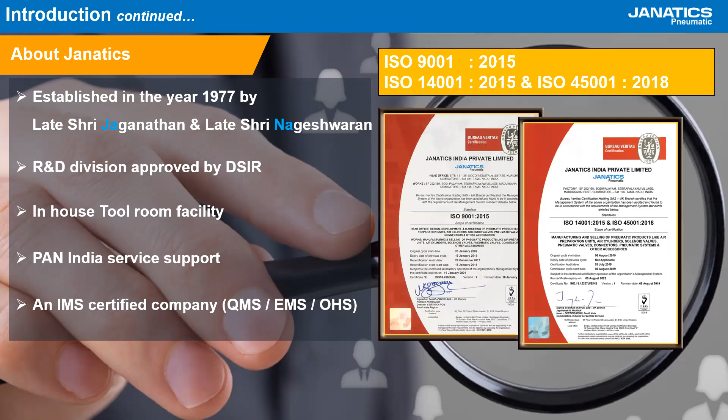Our company has its own R&D division approved by Department of Scientific Industrial Research India and in-house tool room facility. And we have pan-India service support. Ours is an integrated management system certified for quality management system, environmental management system, and occupational safety and health management system.

And we have replacement customers more than 20,000 plus in India. Our manufacturing setup is in Coimbatore with 110,000 square feet in-house capacity spread over 35 acres in Bodipalayam village. In Ahmedabad and New Delhi, we are having a small assembly setup where CKD items will be sent from Coimbatore to there to cater to the customers at the earliest.

In Janatics, we do pneumatic products required for industrial automation, ranging from working elements, that is air cylinders, which we manufacture from bore dia of 6 mm to 600 mm.

And if we take control elements, that is valves, including final control elements and signal elements, those valves we manufacture from the size of M5 to half an inch in various models and sizes.

And if we take service elements, that is filter, regulator, lubricator, we do right from 1/8 inch port size to 1 inch size. In addition to that, airline accessories, fittings, tubings, and hose nipples also we do.

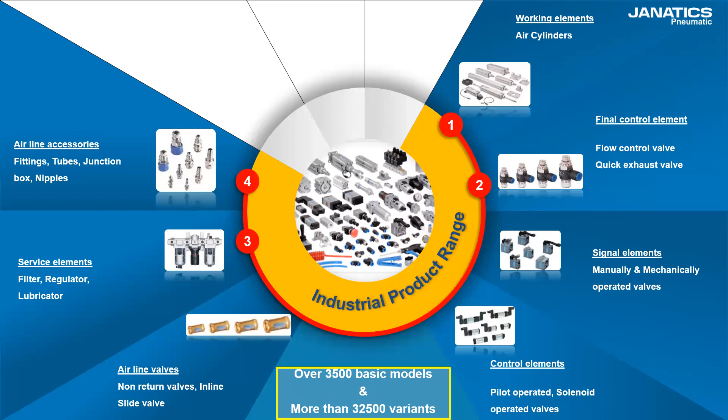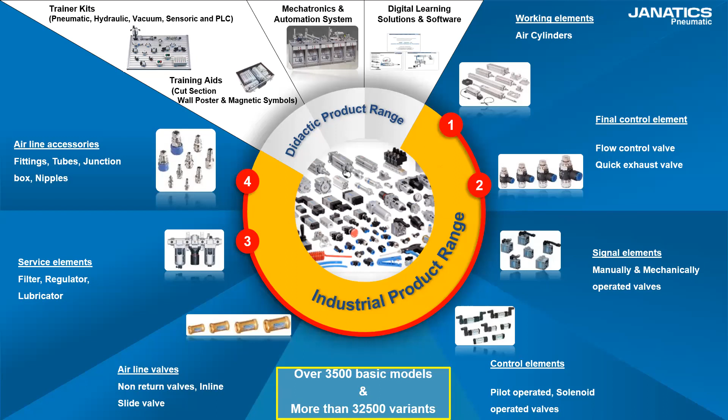With all these products, we are giving educational training kits, that is didactic products, to engineering institutions, like training kits, training aids, automation systems of modular manufacturing systems, a replica of industrial automation, a miniature model, and automation studio software, also solutions for circuit building.

Combining all our products, we give a complete package to the industries, like cabinets, door opening closing systems, a package to BRTS bus transport systems, as well as railways.

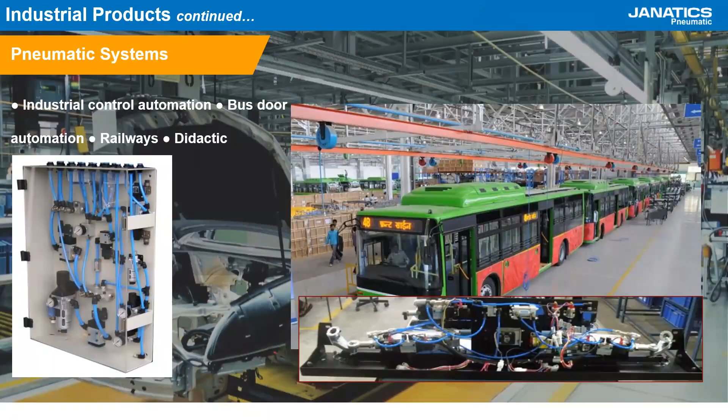Now we enter into the session, basics of pneumatics. So, need for industrial automation.

Industrial automation is done by three major elements, that is pneumatics, hydraulics, and electrical and electronics. In general, these three technologies are used in industrial automation to achieve productivity and consistency in quality, with a reflecting reduction of manufacturing costs.

Though these three automation methods are followed in industries, as we are doing pneumatics, we are going to see more in depth about pneumatics.

In comparison with hydraulics and pneumatics, the medium used in pneumatics is compressed air. In case of hydraulics it is hydraulic oil. Since oil is used in hydraulics, we cannot let it escape to atmosphere as we do in pneumatics.

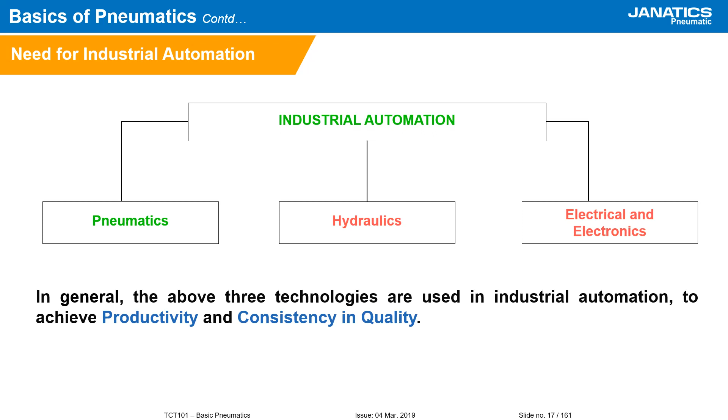The subject that deals with pneuma, a Greek word meaning air, is called pneumatics. Products that use compressed air as a medium for operation are called pneumatic components.

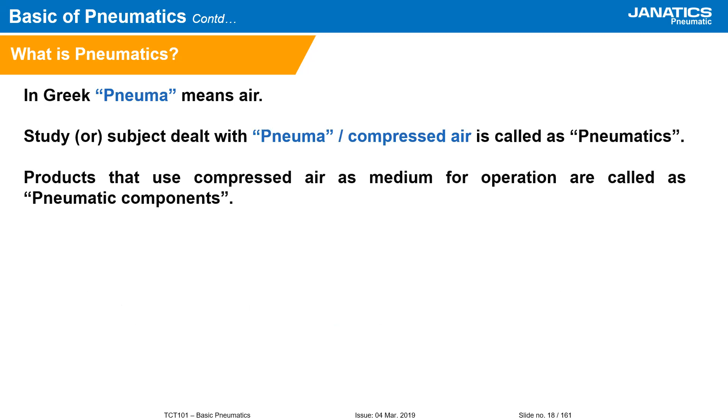So pneumatics is widely used by small and medium scale enterprises implementing low cost automation for reducing machine cost investment, to reduce process time, to increase productivity, and to have consistent quality.

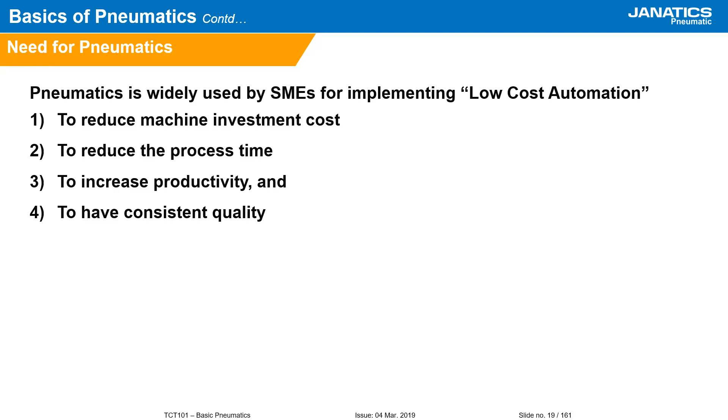So the final output of pneumatics is in the form of actuators, that is cylinders. It will be given in linear motion or rotary motion. Normally linear motion is the output. When we use a rack and pinion in a closed form, we get the rotary actuation, rotary motion.

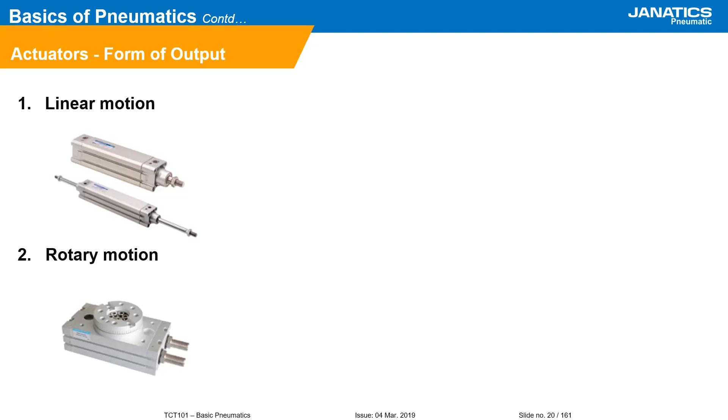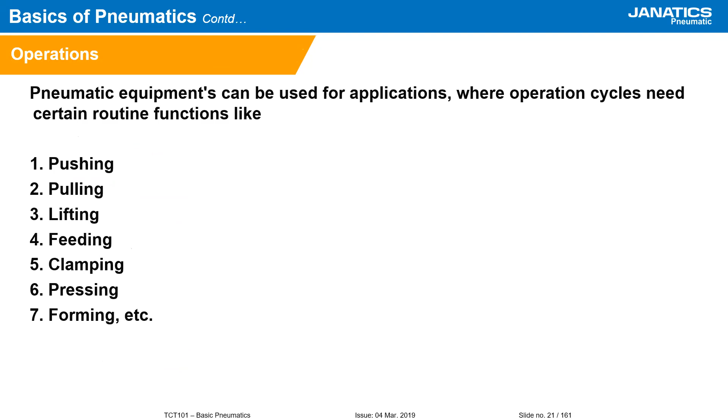These to and fro, repeated operations, wherever repeating in the industry, for that automation these pneumatic cylinders are used, which perform functions like pushing, pulling, lifting, feeding, clamping, pressing, forming, etc.

As we told, the major application areas mostly will be applicable in textile machineries, machine tools, pouch packing machines, shell molding machines, foundry machineries, labeling machines, plastic injection molding machines or rubber molding machines, pharmaceutical machines, etc.

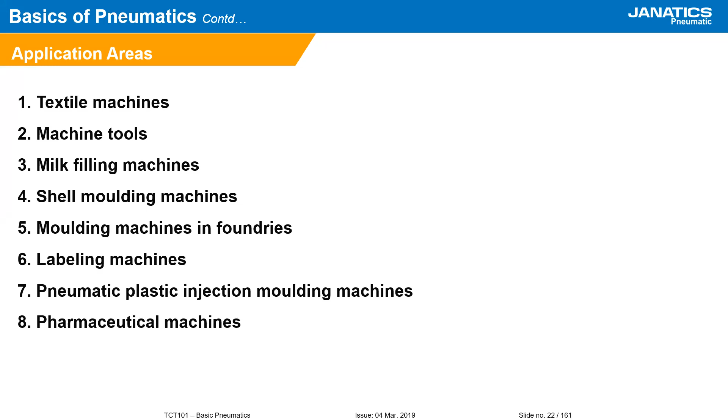In addition to that, pneumatics is completely used as an application in some areas which are called pneumatic equipments. Those are pneumatic horns for automobiles, pneumatic brakes in automobiles, pneumatic spray painting equipment, pneumatic rammers in foundries, and pneumatic drills and grinders in industries.

Classification of pneumatic elements will be classified into 5 major categories. Those are working elements. The final one is the working element where the work is being carried out, that consists of air cylinders.

Air cylinders are controlled by control elements, that is directional control valves. These control elements will control the working element air cylinders, but air cylinders will be performing at high speed, say about 1 meter per second is the normal speed of the actuator.

If you want to reduce or increase the speed of the actuators, we need final control elements, which are flow control valves or quick exhaust valves.

For controlling the working elements, we have to get a signal, that is when to start, after which operation has to be done, like that.

Those signals will be received from such valves which are called signal elements, that is push button valves and roller lever valves.

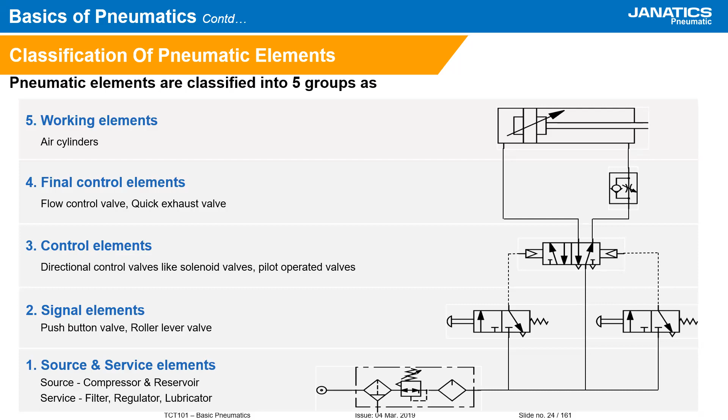These combined items, filter, regulator, lubricator, are called service elements. So these are all the 5 major elements in pneumatics. First, we are going to see about air preparation units, nothing but service units.

You see, when the source, that is the compressor, sucks in atmospheric air, it is pressurized and stored in the compressor tank. That will include atmospheric dust particles, water vapor in the atmosphere, everything.

These moisture and some of the oil from the compressor are mixed together, collide with dust particles, and can form heavy particles which will corrode the seals in the pneumatic products.

So moisture in air can corrode pneumatic equipment, causing malfunctioning of the system due to the emulsion formed by moisture and lubricating oil. The problem is more aggravated in the rainy season or in areas where relative humidity is high, that is, seashore areas. Corrosion will be much more in coastal areas.

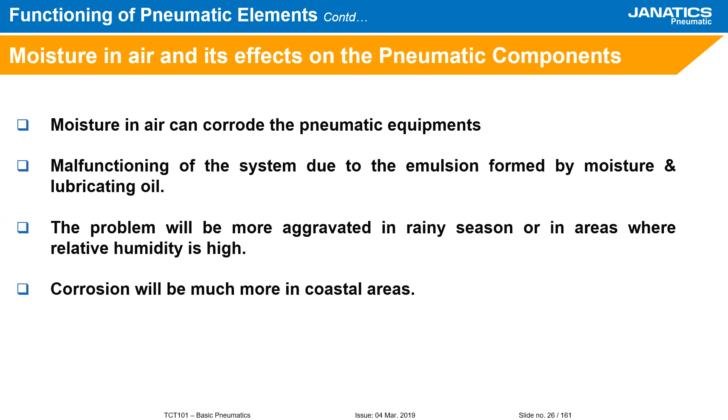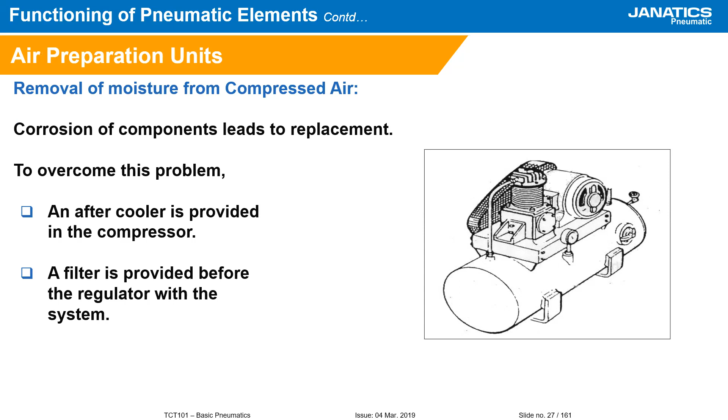To remove these corrosion-causing components, we have to use service elements. To overcome this problem, an after-cooler has to be provided in the compressor, and a filter is provided before the regulator in the system to remove all these unwanted elements.

So, filter. We are seeing how a filter looks internally. This filter separates the dust, dirt, moisture and other contaminants from the compressed air up to a level depending on the size of the filter element.

We can see a filter element here. This is a sintered bronze filter element. This filter size, normally when bought in the market, will be of 40 micron capacity. 40 micron capacity means dust particles beyond 40 microns in size will be filtered, while sizes less than 40 microns will be allowed to pass through.

See here, unfiltered air enters through the inlet of the filter, which is coming here, and will not be allowed to pass directly through the filter element. A conical shield is given there so that the air is allowed to come beneath it.

As well as that, a fan-like product called a separator is also fixed here. This separator ensures that the compressed air has a swirling motion. So when the air swirls, the heavy particles are centrifuged and fall down.

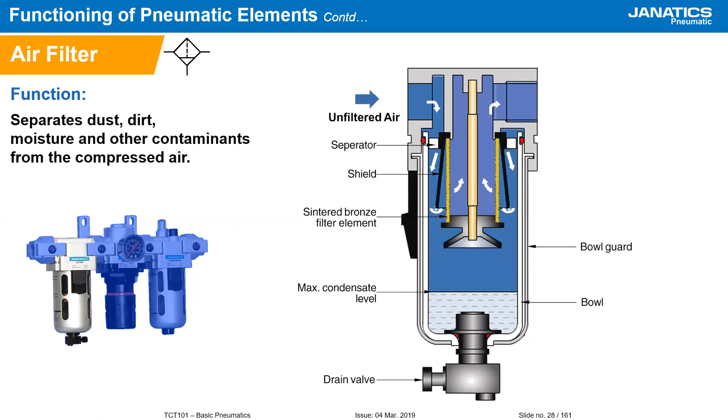So in the filter, this steel bowl guard has a bayonet-type locking arrangement where we can easily remove it. When we remove the bowl guard, the bowl also comes along with it, with a retained O-ring, so there is no chance of the O-ring falling.

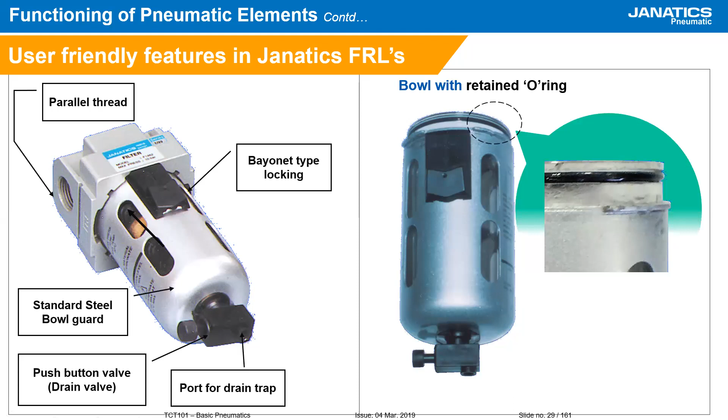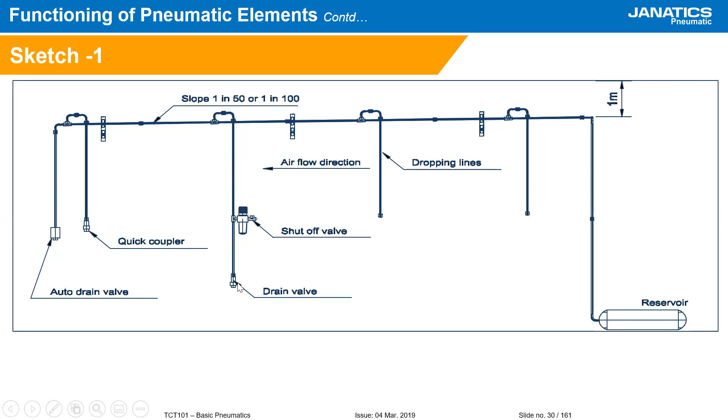From the hip level, at least 2 feet is required to collect the water or dust particles anyway due to gravity itself, and here auto drain valve can be fixed.

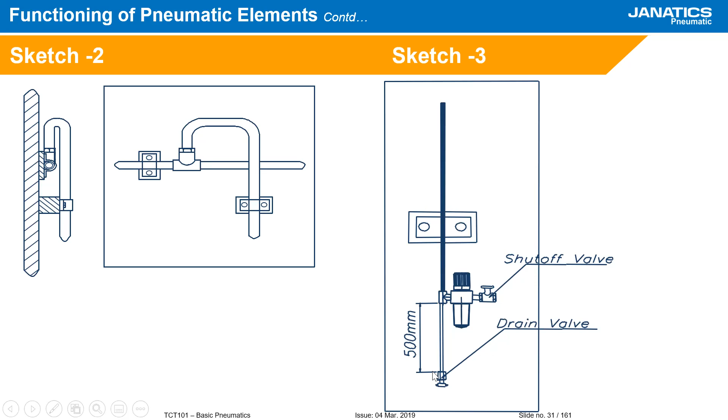That is about the filter, and now we are going to see the pressure regulation. What is pressure regulation?

Pressure is nothing but when we have a 1 liter bottle of water without any medium inside, air will automatically be there filling the 1 liter. Though the 1 liter of air is inside the water bottle, if you fix a pressure gauge, it will show 0 bar.

That pressure has to be regulated when used in automation. For that, a pressure regulator is required.

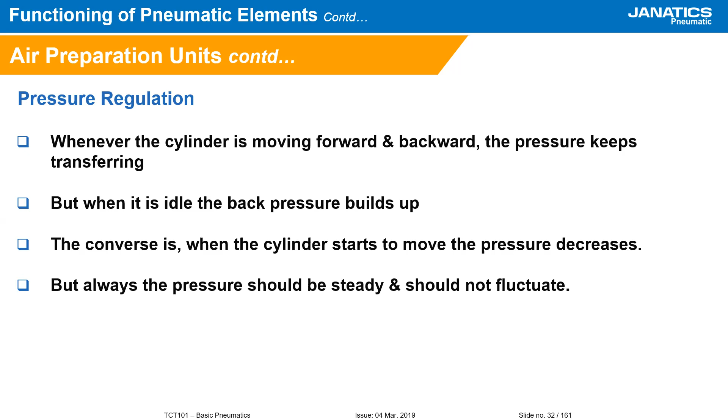In another way, we can say that if we need to pick and place a glass tumbler, what will happen if pressure fluctuates? If the pressure exceeds, the glass will break. Otherwise, a pressure drop would make the cylinder drop down and break it.

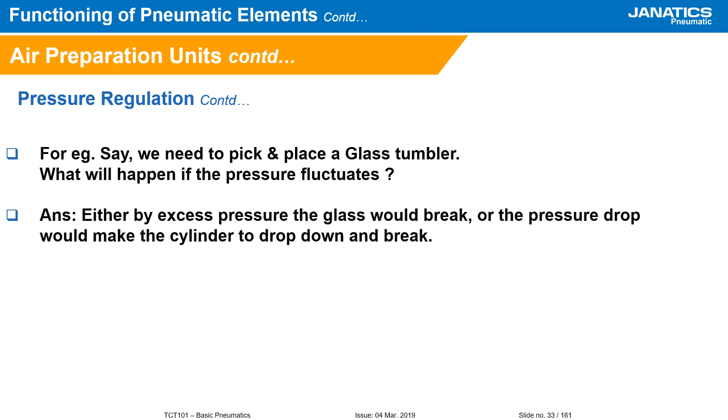So how does the pressure regulator function? We can see. To maintain a steady outlet pressure, regardless of a fluctuating inlet pressure, we need a regulator to control the pressure and have the outlet pressure without any fluctuations.

In case of the filter, it has to always be mounted in this vertical position only, because water will be collected here, so it should not be mounted in any inclined position. Whereas the regulator can be fixed in any direction.

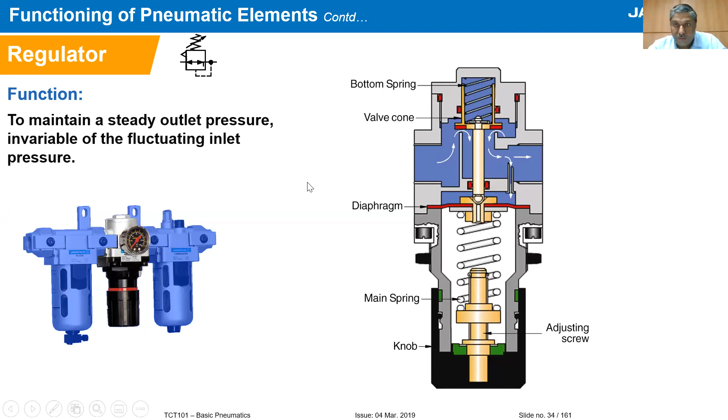Lubricator is used to feed lubricants to pneumatic equipment. Why does it need to be lubricated? Due to friction, heat is generated, which leads to damage of seals. So in order to reduce heat generation or friction, we mix lubricants along with the compressed air and allow it to pass through the compressed air. For that, lubrication is required.

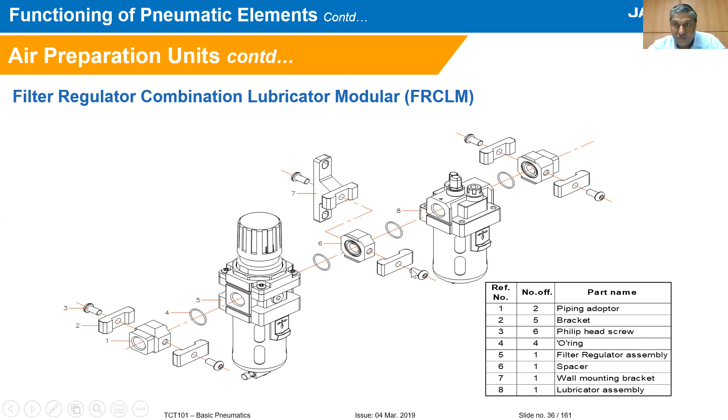This screw or this screw, if we remove it, the regulator can be easily removed. So there is no need for hard pipe wrenches or spanners to remove this. So maintenance will be easy if we are mounting with modular arrangements.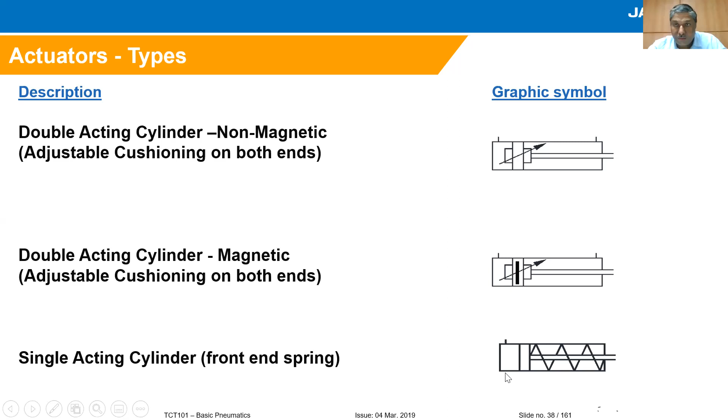Whenever we talk about single acting cylinders, we have to specify whether the spring is a front-end spring type or a rear-end spring type. In a single acting cylinder, there will be a spring guide here and the spring is used here.

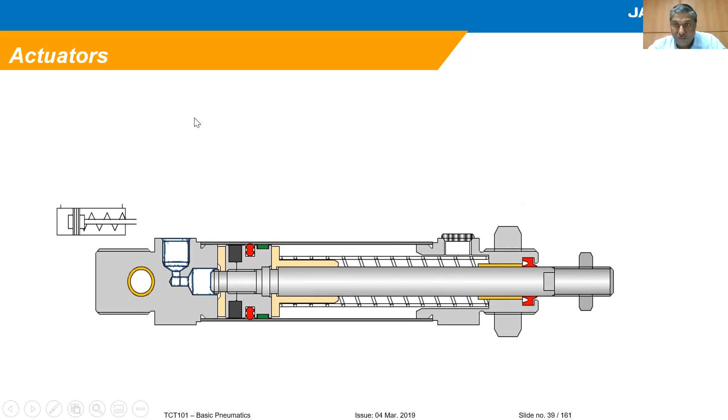The parts are: barrel, piston, spring guide, rear end cover, and front end cover. Air is given only to the rear end cover. It presses the piston against the spring force and makes the piston move forward, extending the piston rod. If you disconnect the air, due to the spring force, the piston automatically retracts. For this purpose, single acting cylinders are used.

So single acting cylinders perform operating force motion only in one direction. For motion in the other direction, they depend on a spring or some external mechanical force. Even if a spring is not used in the cylinder, depending on the application, external mechanical force can also be used for returning the cylinder. In that case, even though it is a double acting cylinder, it will act as a single acting cylinder in applications.

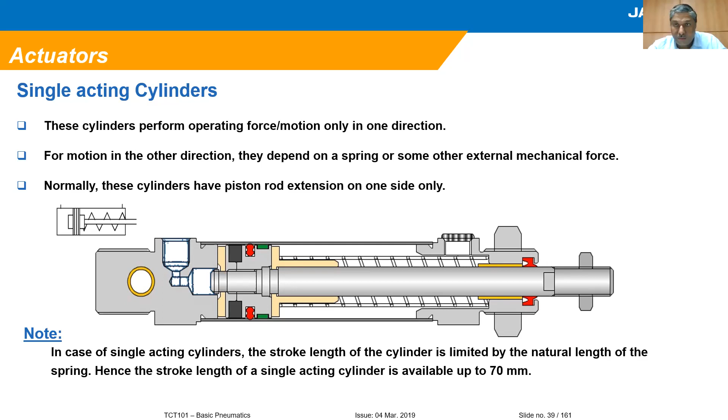So normally these cylinders have piston rod extension on one side only. In the case of double acting cylinders, the spring is not there, that is the difference.

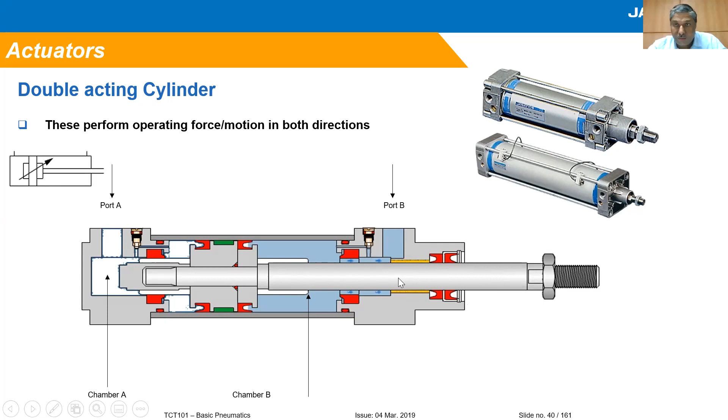Normally these double acting cylinders have a sintered bronze bush for better support. The length of the sintered bronze bush is such that it won't allow the piston rod to bend, because the piston rod extends outside and due to the cantilever load, it should not bend. For that, sufficient length of sintered bronze bush is given here.

A double acting cylinder that has a piston rod on both ends is called a double end double acting cylinder, where simultaneously any work can be done.

For example, if two drilling machines are kept side by side, one single operator can operate both using a double end double acting cylinder for clamping. When one drilling machine's clamp is engaged, the other end will be free, where the operator can remove the finished product and load another for drilling. When we actuate the cylinder the other way, that side clamps, and the drilled part can be removed and a new product loaded. These types of applications use double end double acting cylinders.

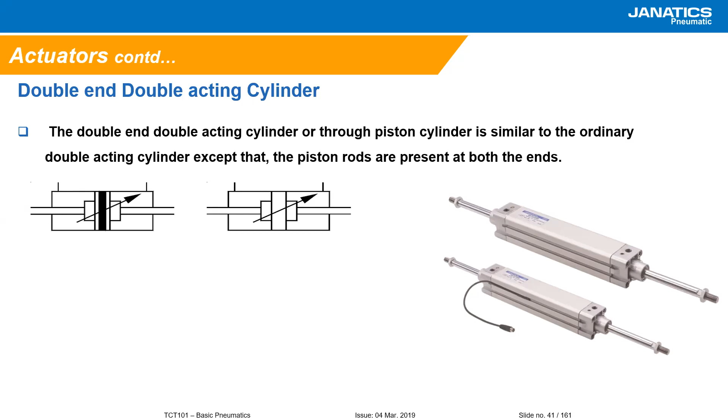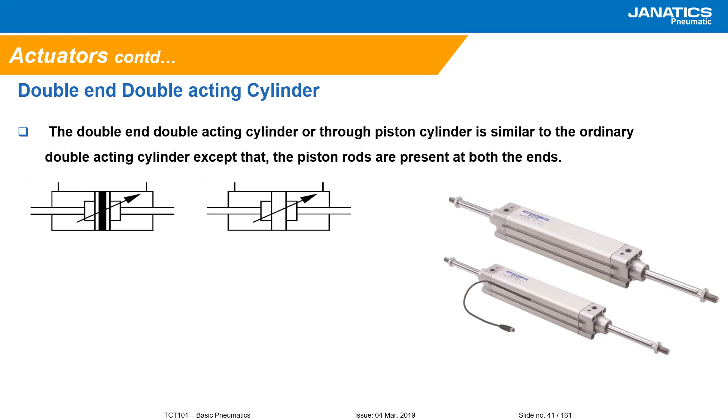Double end double acting cylinders are also used for adjusting stroke length. Suppose a cylinder has a 100 mm stroke length; if we add a 20 mm bush on the opposite side of the piston, instead of 100 mm stroke it will allow only 80 mm. So in a fixture where we don't want multiple cylinders or multiple fixtures, or don't want to change the cylinder, this arrangement helps reduce time.

Another type of actuator is the multi-position cylinder. In multi-position cylinders, the cylinders are mounted back to back, as you see in the picture. It can perform 3 or 4 positions.

Connecting two cylinders of identical piston diameter but different stroke lengths in series gives back-to-back cylinders. As the pistons of the cylinders are not joined together like in double end double acting cylinders, they tend to travel in opposite directions.

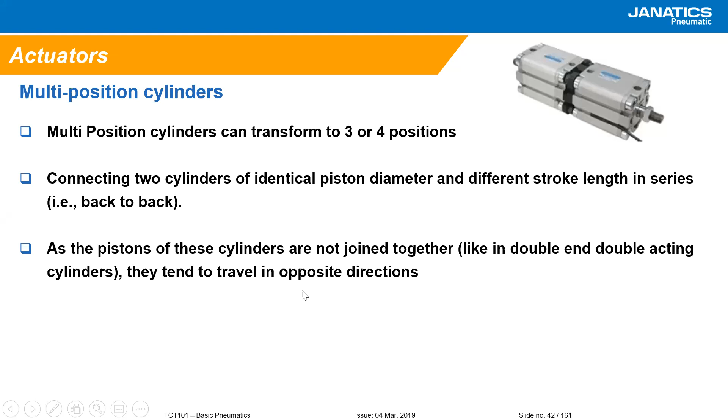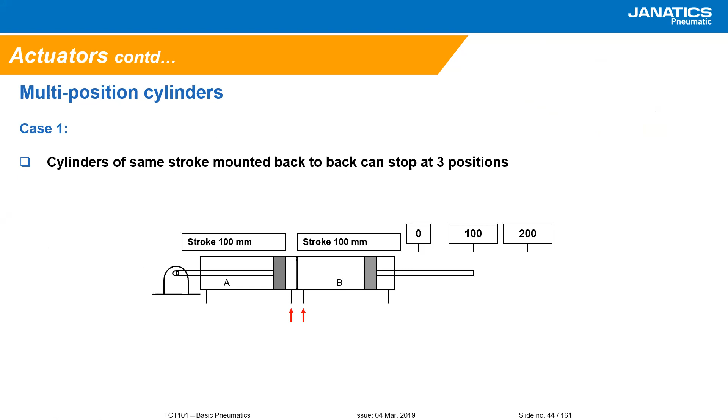For example, consider a multi-position cylinder with two equal stroke lengths, A and B, each 100 mm. When I operate cylinder B, it gives a 100 mm stroke. If, while B is extended, I also operate cylinder A, it gives a second position of 200 mm. When cylinder A is actuated alone, it again gives 100 mm. But if we have different stroke lengths, say one of 100 mm and another of 50 mm, we can achieve 4 positions: 0, 50, 100 and 150 mm strokes.

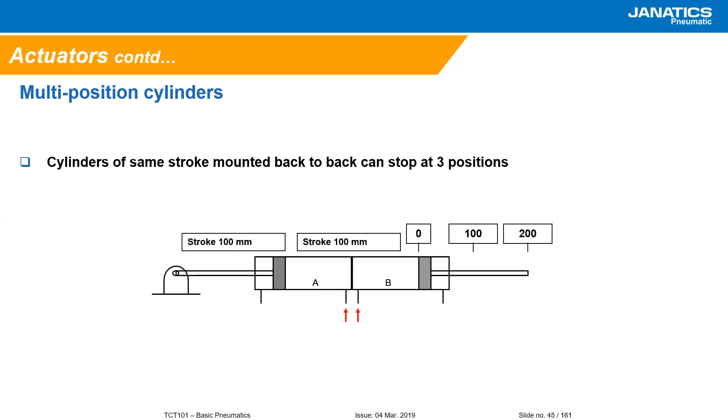For this purpose, multi-position cylinders are used.

Compact cylinders. When explaining double acting cylinders, I mentioned the sintered bronze bush used for better alignment when the piston rod comes out, to arrest the cantilever load. This bush is provided, and because of it, the length of the front end cover is much higher.

In case of dies or certain application areas, cylinders are required with total length fitting in a very short span. For these areas, we use compact cylinders where the sintered bronze bush length is very small, so the end cover length is also sufficiently reduced. They provide the same force forward and retract as a normal cylinder, but the total length is much less. Because of that, we should not have more length of piston in this compact cylinder, otherwise cantilever load will cause leakage.

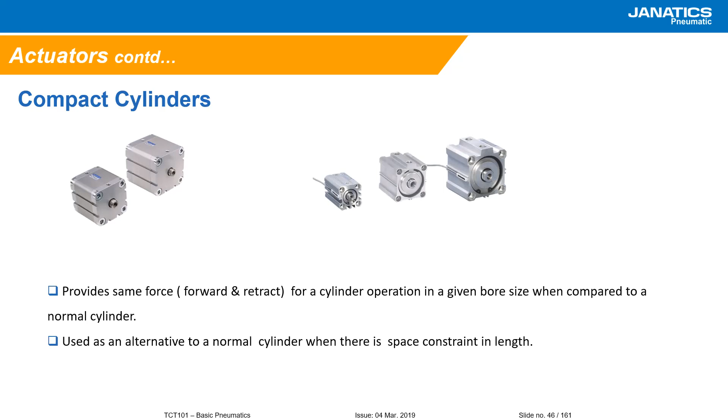Compact cylinders are used where the total length of the cylinder cannot be accommodated. In case sufficient length is available but width is not, we can go for tandem cylinders, where the piston rods are connected.

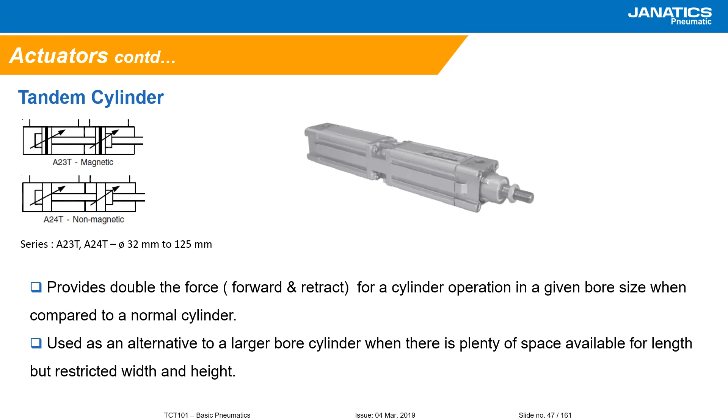When air is given to the rear end connection, the output force is doubled. For example, suppose a load of 1.5 ton is required; we would need a 200 mm bore diameter cylinder. But a 200 mm bore dia cylinder has a width of nearly 1 foot, and in some cases a 1 foot width cylinder cannot be accommodated. So instead we can use two 125 mm diameter cylinders in tandem position, so that the required load can be achieved. In such cases, tandem cylinders are used.

Another type of actuator is the rodless cylinder. In a normal cylinder, a rod comes out, whereas in rodless cylinders there is no rod. Instead, there is a sliding projection, and this slide is able to move from one end to the other. So the total length of the cylinder will not be very high.

These type of cylinders are used in door opening and closing applications of 1 meter or 2 meter length. Rodless cylinders can be used where the total length is a constraint - in case of a normal cylinder of 1 meter stroke length, the total length of the cylinder will be beyond 2 meters. Whereas in case of a rodless cylinder, that 1 meter plus the end covers length all together will fit within 1200 mm itself.

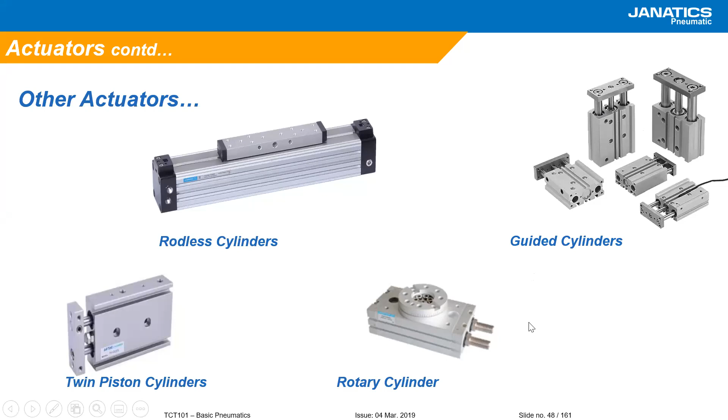And the same cylinder with an inbuilt rack and pinion arrangement will give a rotary motion - that is called a rotary cylinder.

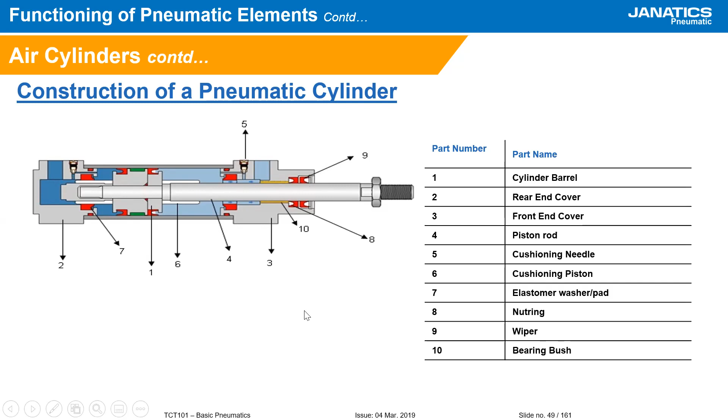This is a simple construction of a pneumatic cylinder.

In the cylinder, when the piston rod is moving - that is, in automation applications - it is often required for a signal to be generated when the cylinder piston reaches a particular position along its stroke, so that the control system can initiate the next phase of operation. Think that a cylinder is moving forward of 100 mm stroke - once the 100 mm position is reached, the next operation has to be done. For that, a signal has to be received from the system. That signal can be generated when the piston rod trips a micro switch or a pneumatic valve which is placed near the piston rod.

Or otherwise, magnetic sensors mounted directly on the cylinder barrel sense the magnetic field created by a permanent magnet incorporated in the piston and trigger a reed switch. That reed switch output can be used as a signal. So these are the two ways the position can be sensed.

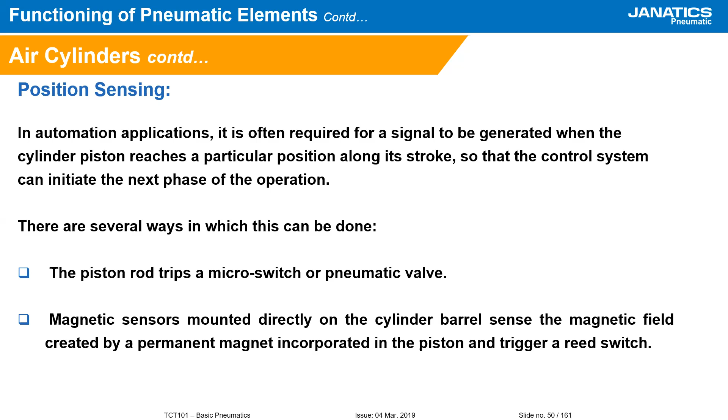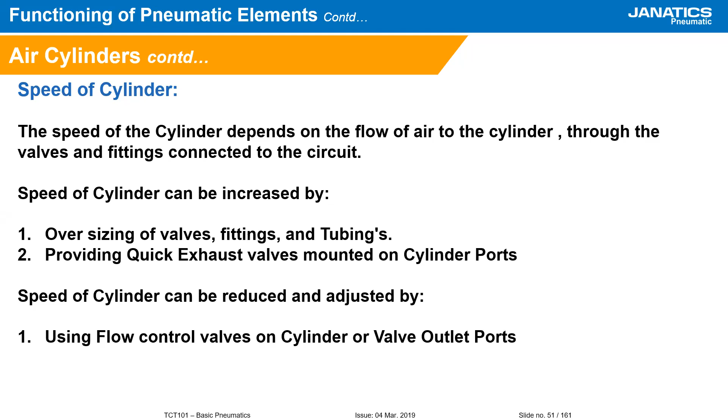In case of speed of the cylinder, the speed depends upon the flow of air to the cylinder through the valves and fittings connected to the circuit. Speed of the cylinder can be increased by oversizing valves, fittings and tubings, or providing quick exhaust valves mounted on the cylinder ports. Speed of the cylinder can be reduced by adjusting flow control valves on the cylinder or valve outlet ports.

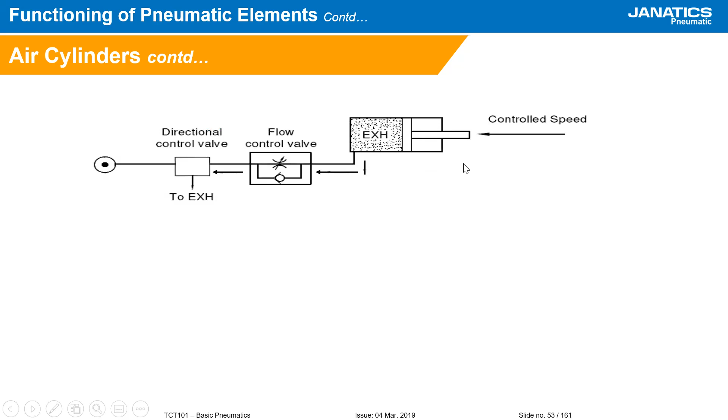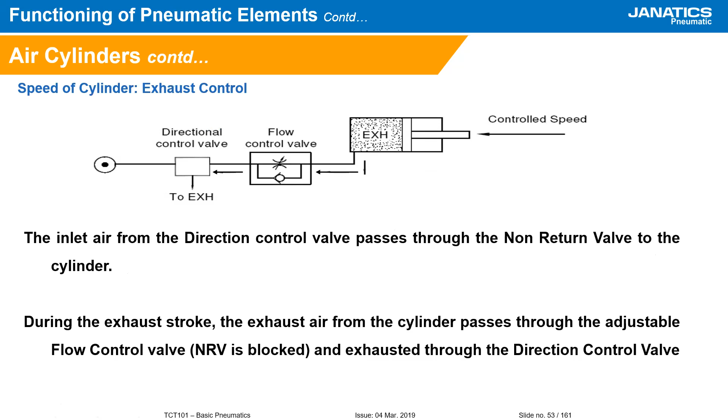That is, the inlet air from the direction control valve passes through the non-return valve to the cylinder. During the exhaust stroke, the exhaust air from the cylinder passes through the adjustable flow control valve because the NRV is blocked, and is exhausted through the direction control valve. So when we use both valves, inlet control type and exhaust control type, controlled speed in both directions is achieved.

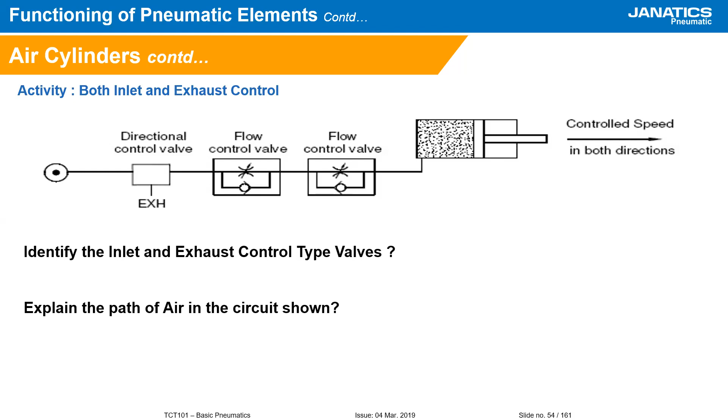From this we can identify which one is exhaust control and which one is inlet control. It is always advisable to have an exhaust control method in pneumatic operation. If we have controlled speed where the inlet air is controlled, there is a chance of getting a jerk during cylinder operation. So we have to ensure the exhaust air from the cylinder is always controlled for getting a smooth operation.

In case of cylinders, as I told you earlier, we manufacture 6 mm bore diameter to 600 mm bore diameter cylinders. So for our application, which cylinder has to be selected? That will be a question. For selecting a cylinder, the size we require depends upon the load it is going to actuate, or the load it has to pull or push, whatever it may be, and the available air pressure.

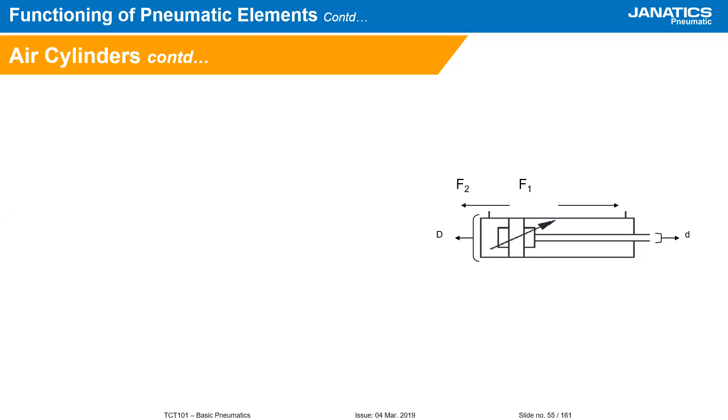So when the cylinder is static, how do we get the force available at the piston rod end? During extension of the piston rod, the force given by a cylinder is the cross-section area of the piston multiplied by the pressure, multiplied by mu, that is the coefficient of friction. We take this as 10% frictional loss, meaning 90% efficiency is considered for the cylinder. So 0.9 is put as the coefficient of friction.

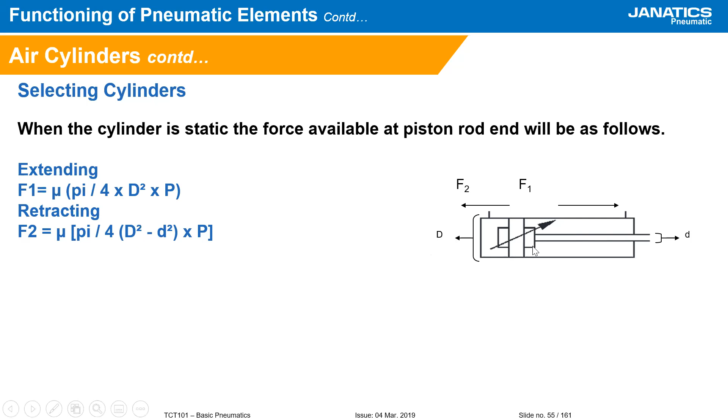Since the force exerted by a cylinder is area into pressure, and the pressure from the compressor air is normally 5 bar, the area of the bore diameter or the piston area, which is circular, is pi by 4 d square into pressure. In case of return force, the piston rod area has to be reduced from the piston diameter, because in that area air pressure will not be applicable.

So F1 is the extending force in kilogram force, F2 is the retracting force in kilogram force. Pressure is the working pressure, that is gauge pressure. D is the cylinder bore diameter in centimeters, small d is the piston rod diameter in centimeters. Mu is the percentage coefficient of friction, assumed as 0.85 to 0.95, averagely taken as 0.9.

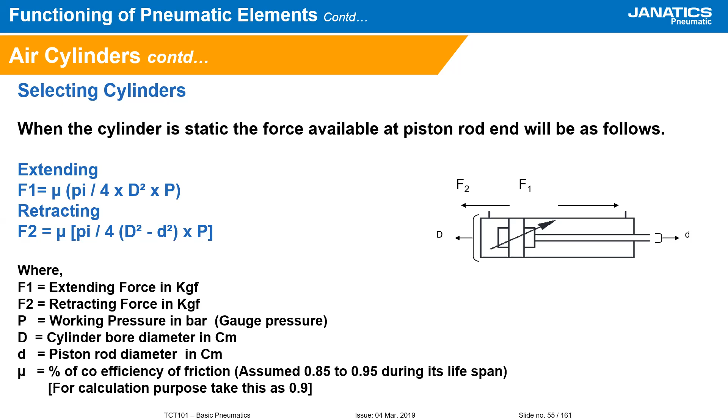So according to the load, we can select the bore diameter of the cylinder, and according to the length of the application, the stroke length can be derived. So if we take the bore diameter and stroke length, we can select the cylinder.

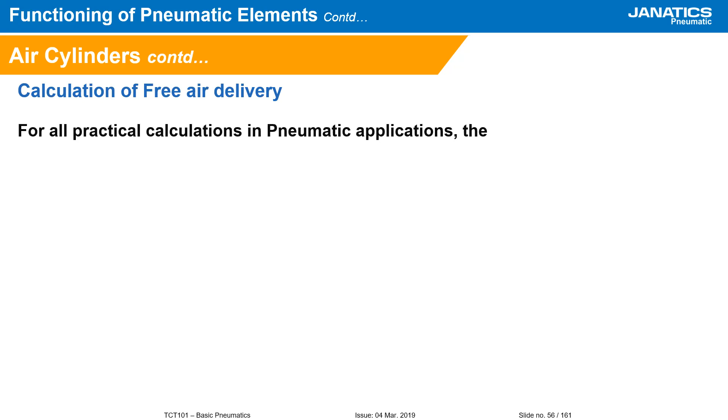When a number of cylinders are used in a machine, we want to know the free air required for operating those cylinders. For that, the volume of air is calculated for the cylinders. For all practical calculations in pneumatic applications, the volume of compressed air is always converted into free air.

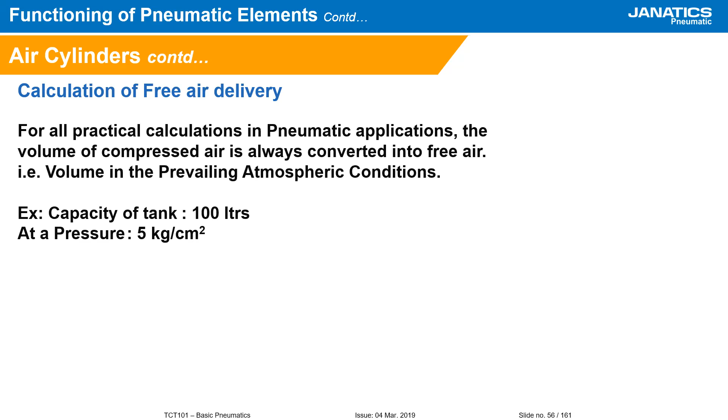Volume of prevailing atmospheric conditions: suppose capacity of tank is 100 liters at a pressure of 5 kg per centimeter square, meaning the entire volume of free air exhausted into atmosphere is calculated by absolute pressure P1 equals gauge pressure plus atmospheric pressure, that is 5 kg per centimeter square plus 1 kg per centimeter square, where the gauge pressure is 5 kg per centimeter square, giving 6 kg per centimeter square.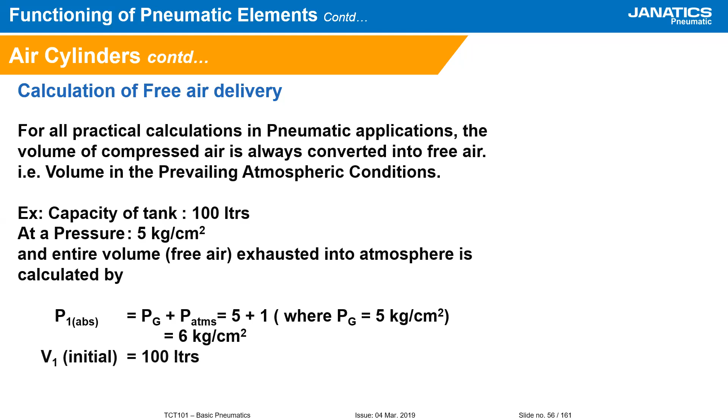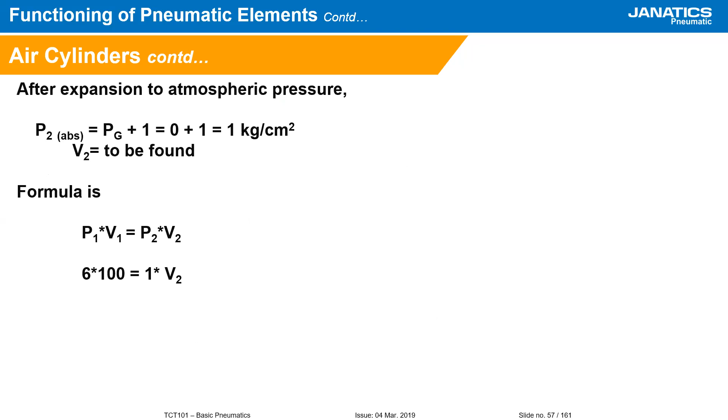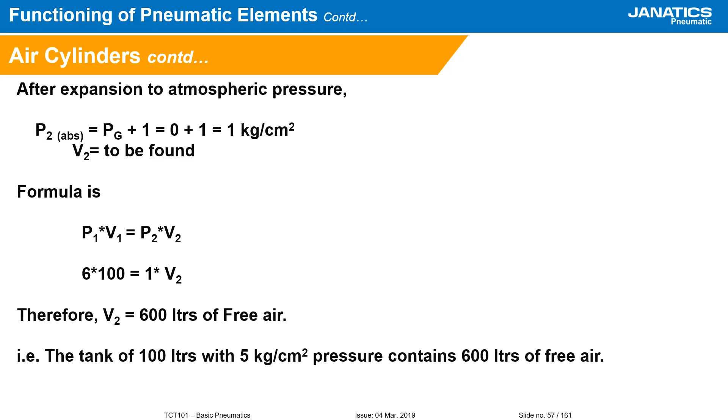So we know P1V1 equals P2V2. In this case, 6 into 100 equals atmospheric pressure 1 into volume 2, therefore V2 volume is 600 liters of free air. The tank of 100 liters with 5 kg per centimeter square contains 600 liters of free air.

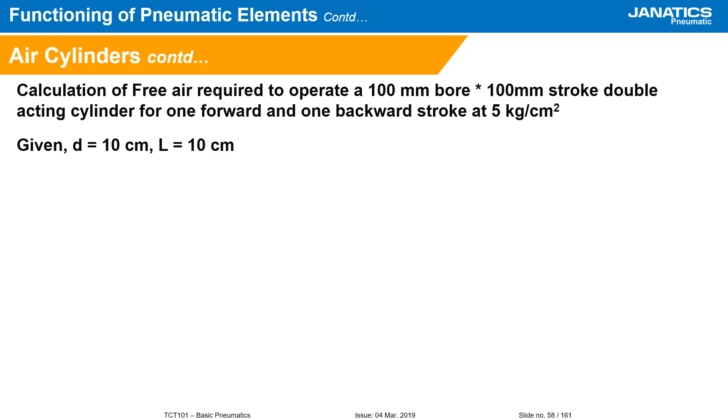Similarly, for calculating the free air required to operate a 100 mm bore, 100 mm stroke double acting cylinder for one forward and one backward stroke at 5 kg per centimeter square: diameter is 10 centimeters, length is 10 centimeters, double stroke volume of cylinder is one forward and one return. So we put 2 times pi d square by 4 into length, divided by 1000, because 1000 centimeter cube equals 1 liter.

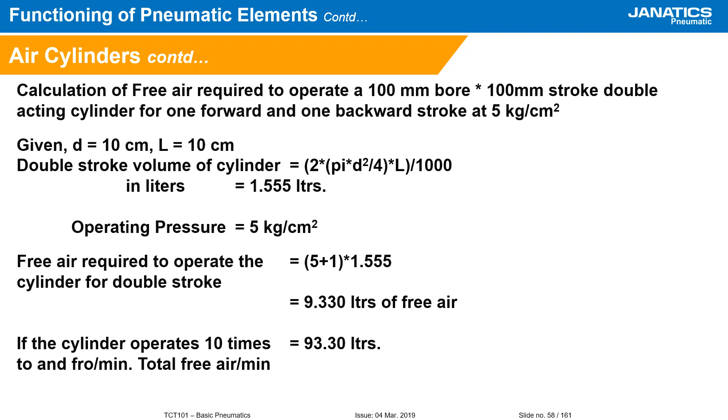If the same cylinder is operating 10 times to and fro, then it will consume 93.3 liters. This is required because we need to know how much HP of compressor we have to buy for that particular machine. As a pneumatic person, the machinery manufacturer has to tell how many liters of air or cubic feet per minute is required for operating this machine, and accordingly they will buy the compressor.

We should also take into account the unswept volume in cylinder, pipeline and valve volumes, line leakages, and loss of efficiency of cylinders and valves over a period of time when we select the compressor.

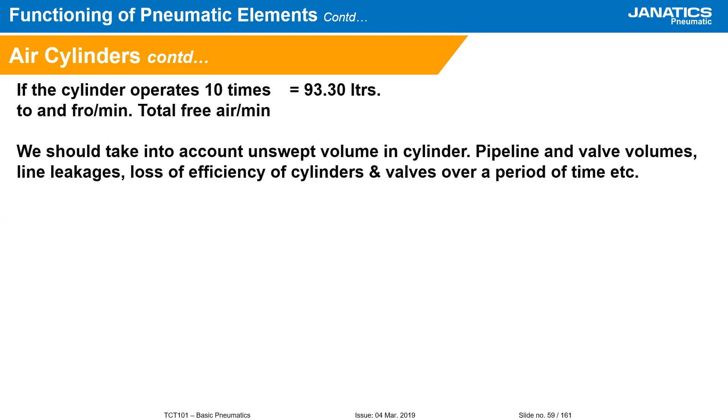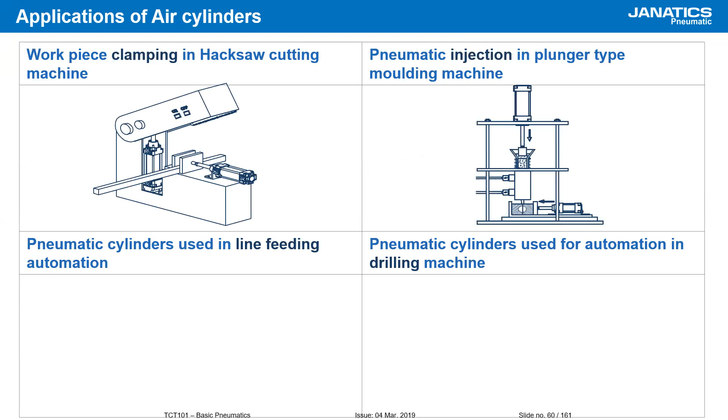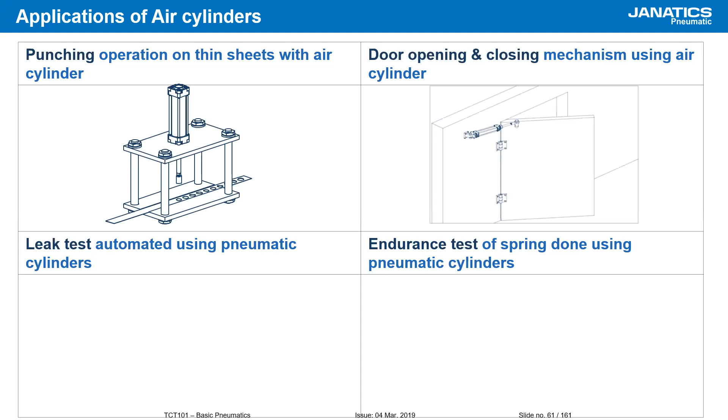Various types of applications of air cylinders are clamping purposes, in injection molding for plunger pressing, die clamping, punching operation, door opening and closing applications, and leak testing fixtures for moving the tub up and down.

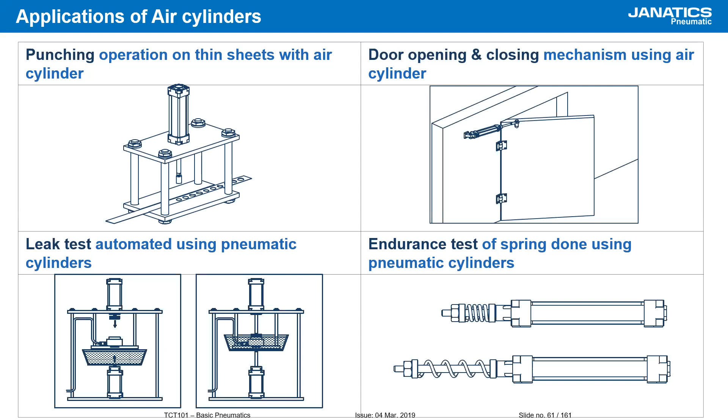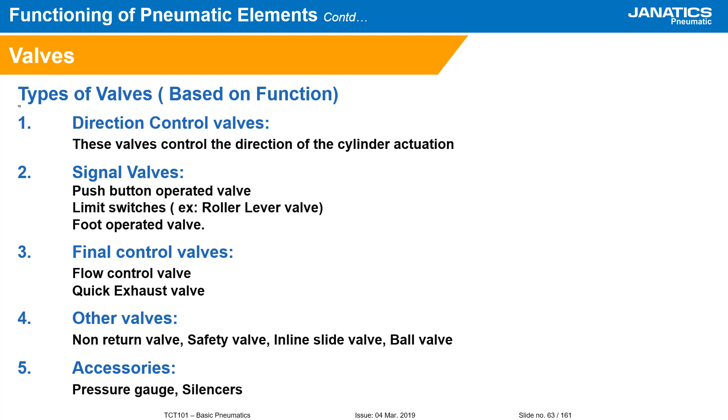Other valves are final control elements, such as flow control valves or quick exhaust valves to control the speed of the actuator. Other valve types include non-return valves, safety valves, and on-off valves such as ball valves or inline slide valves. Accessories used with valves include pressure gauges, silencers, etc.

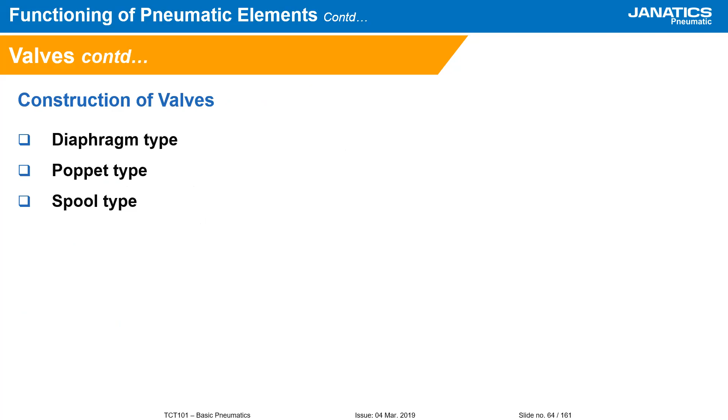The valve will be named based on mode of actuation and mode of reset. When describing a valve, it is told as number of ports, how many ports it has, number of positions it handles, and mode of actuation and mode of reset.

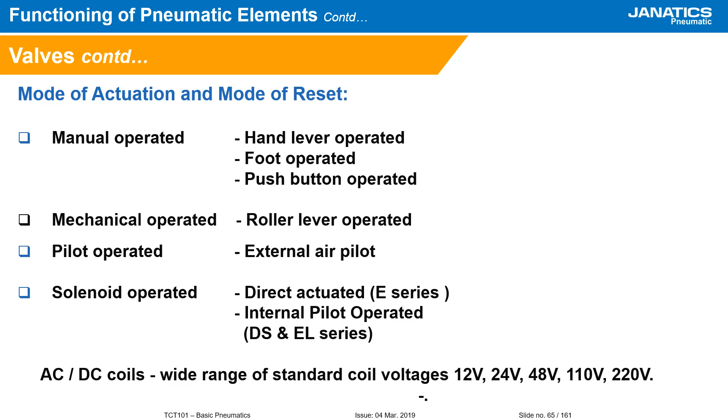In mode of actuation, we have manual operation - either hand lever operated, foot operated, or push button operated. Mechanical operation, for example roller lever operation. And pilot operation, external pilot. Solenoid operated means using a solenoid coil for direct actuation. In solenoid operation, there are direct actuation or internal pilot operation types. Solenoid coils come in AC or DC, with a wide range of standard coils from 12 volts to 220 volts, AC or DC.

As I told earlier, the valve is named in the following order: number of ports, number of positions, mode of actuation, and mode of reset.

Number of ports, that is 2 ports. Here, it is one position. Within a position, 2 ports are there - 1 is input and 2 is output. As per ISO 1219, these ports are...